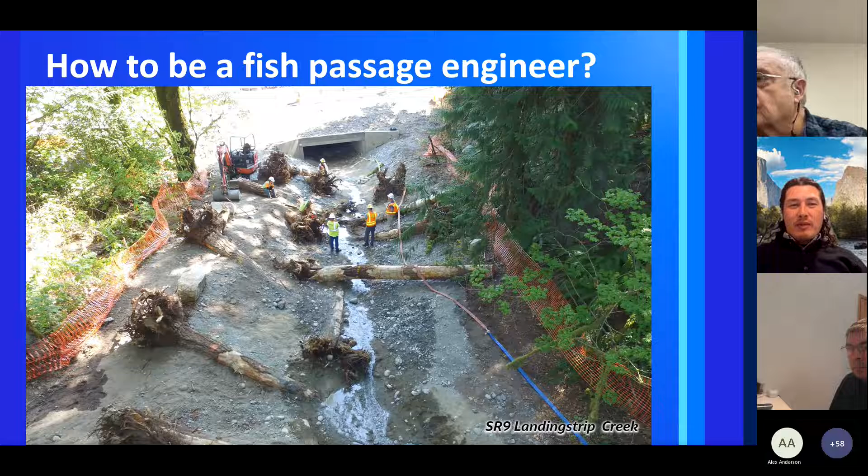Anyways, I'll share my experience in this presentation, highlight a project that Jacobs worked on, share some basic design approaches, share a little bit of how it's implemented into construction, and hopefully convince you guys by the end of this to join this fish passage movement if you haven't already.

I'll start by telling you that fish passage engineering has great stability, meaning there is a ton of funding out there to support it. I'll also share with you why I think it's really the best bang for your buck.

If you're thinking restoration, it really has a high cost benefit ratio if you're focused on habitat for fish. One reason I'm a fish passage engineer is I like to see immediate results. Once the project is complete, you can go out and see the fish literally swimming upstream of your project, and you've essentially opened that door that was otherwise shut for fish to pass and utilize that existing stream habitat.

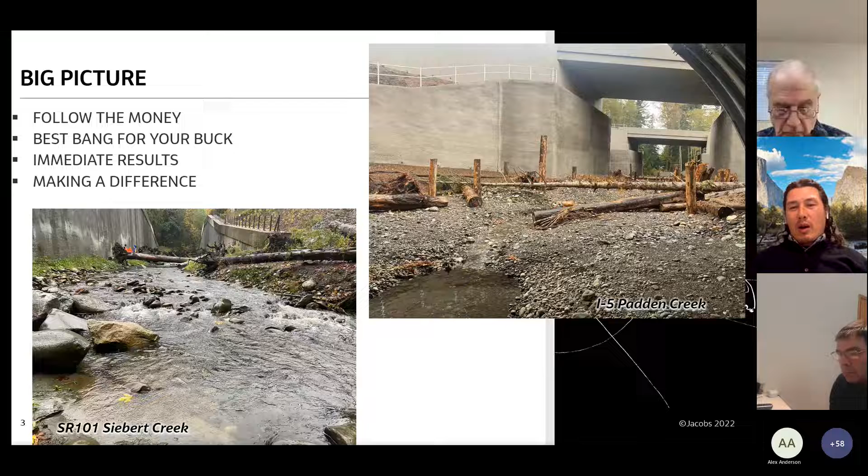The other part is just really that feel-good of making a difference. Again, a reason why I connect with fish passage is I like to work in that fringe where the natural world and the developed world literally intersect, and as an engineer, trying to find that balance between both the human living environment and the aquatic environment, and trying to get that to thrive together.

Fish passage really requires a multidisciplinary approach where the primary disciplines, in my experience, are not actually engineering. After putting together this presentation, I joked with some colleagues about how much engineering is actually in fish passage, which is kind of funny because it's really starting to get removed from it. But the engineering is still important, and it provides those checks and balances. But if you're really doing it right, the leading disciplines are really your science-based geomorphology and biology.

The engineering is there for that human piece of it, understanding how the designs really interact with the infrastructure, and to make sure we balance and see what kind of risk to life, property, or structures would be.

The reason fish passage is also exciting to me is there's no two fish passage projects alike. You have to start each project by really understanding what the existing conditions are, and you really focus and study that. You need to read the land - I'm going to hit this one really hard later in the presentation. This is that geomorphology piece.

So what's the purpose of all this? The fish, right? Too often I get in deep conversations with engineers or resource managers, and we actually lose sight of why we are here. We often have to remind myself or ask people in the room, hey, what would be best for the fish? Where's the fish biologist? We're stuck between these two concepts: what type of habitat do we need to create in this location? That'll start to go into some of the restoration pieces that I'll also talk about in this presentation.

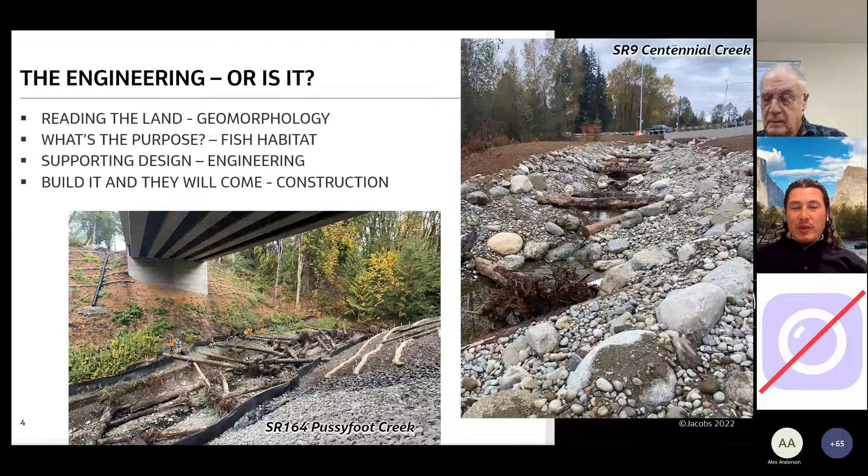So what are we spending on fish passage? This blows my mind in some regards. WashDOT had a federal court order in 2013 that found WashDOT and Washington State culverts violate the 1855 Treaty of Point Elliott and the Boldt decision of 1974. That guaranteed the tribes permanent access to their usual and customary fishing grounds.

Under the court order, the state had to accelerate its pace of culvert work specific to threatened and endangered species and salmon. So you can see WashDOT has set aside $2.4 billion for fish passage, and that's just what they've allocated - the actual cost is closer to $4 billion. That's a ton of money just in Washington State, and it's mostly dumped in the Puget Sound area. Any water bodies in the injunction area that flow into the Puget Sound is where a lot of that money is going.

This other funding package that just rolled out last month, if you're not aware of it, came from FHWA - part of their National Culvert Removal, Replacement, and Aquatic Organism Passage program. This is a $1 billion grant over about 8 to 10 years, but for the next biennium there's $200 million. So this is a big package that just rolled out. For those local agencies, tribes, and folks we're working with who say we don't have any money - well, there's a ton of money that just rolled out. So I'm pointing folks to that.

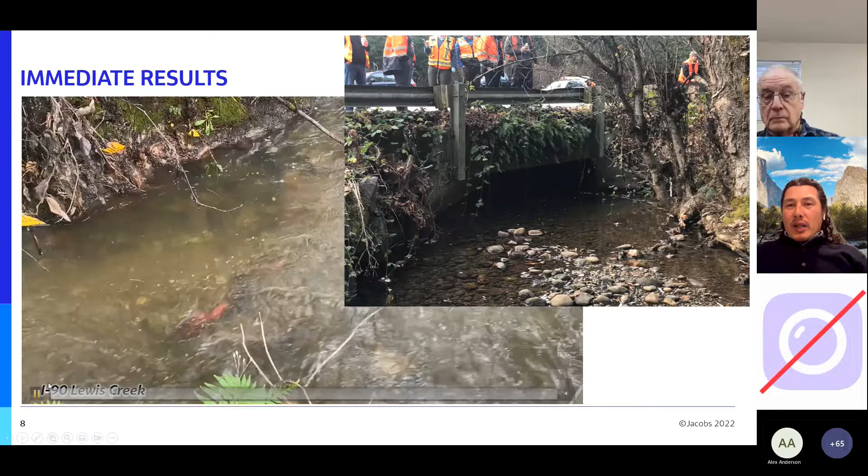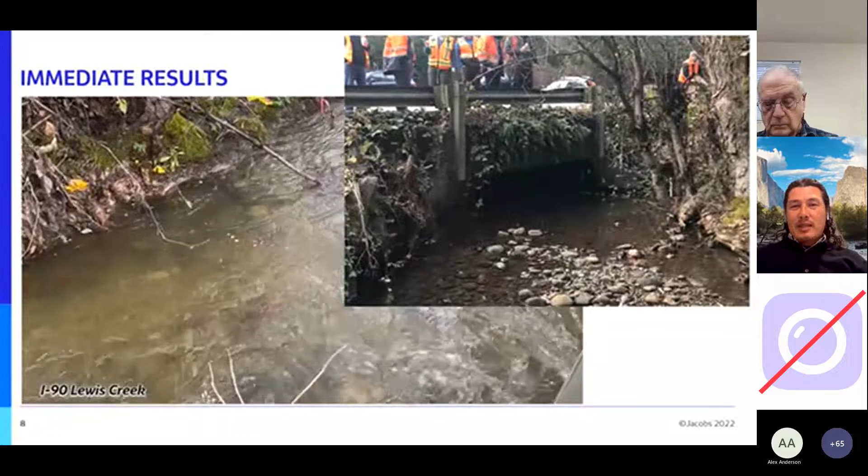Fish passage projects provide immediate results. This is a video I took of sockeye salmon returning to spawn in Lewis Creek, just up from Lake Sammamish, but they've reached the end of the road. This culvert's inlet, on the right, is 1,000-foot long, 4.5% slope. This limits their access to those spawning grounds.

This is a photo of the upstream. This is untouched natural habitat that we don't need to work on restoring, it already exists. We just need to get them to where they need to go.

There's a quote from a local representative last month that talked about the salmon. It said, salmon travel hundreds of miles to spawn only to be blocked by barriers within a few miles of pristine habitat. Simply put, culverts are wiping out salmon on the 1 yard line.

This is the Marshawn Lynch Super Bowl, where there's a touchdown on the right, or the end zone on the right, and they just can't get there. So, sorry, bad joke.

All right, well, making a difference. Most of the stream engineers I work with have the same inherent desire in common. We all want to be better engineers than our forefathers and better balance that built environment with the natural environment. We get to do that through our work in fish passage and stream restoration.

I remember saying to myself, I can't wait to show my kids the fish barriers that I've helped correct in my career, and then take them to the streams to see the salmon run. Well, I'm old enough to say that I'm there, and these are photos of my kids, some of them, and we're out there looking at the streams, finding fish.

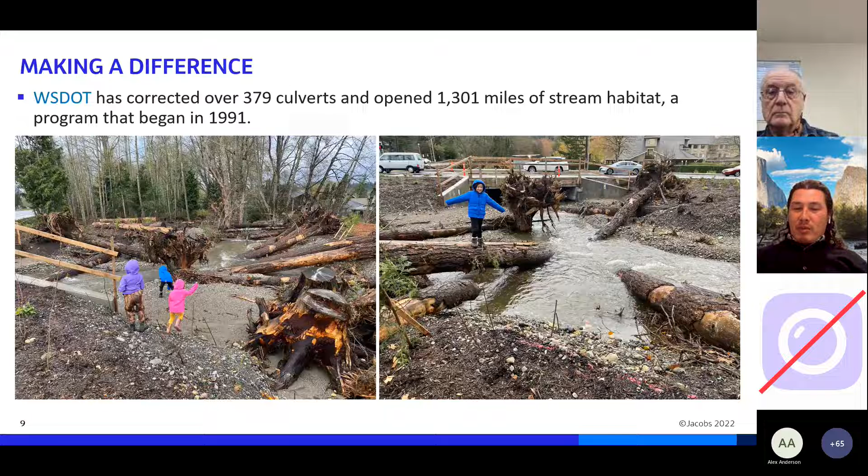So whether you have kids or not, this is actually a great time to start getting out in the streams. It's been dry for a while, so probably not much moving right now, but after we get a few more rains coming up, we'll start to see fish running up these streams and tributaries. Take the time, take out friends, family, significant others, and get out and see these fish in the streams, and maybe you can pick out a few barriers while you're out there. So this is the making a difference part.

All right, so here's where I step into the process of designing a fish passage project. There's the desktop analysis. Before you go out to the site, you're pulling out maps, looking at the geology, looking at LiDAR maps, land use. You might do some coarse hydrology to get a sense of what's coming down the pipe. You're looking upstream, downstream, other barriers that may be on site that may impact the crossing you're working on. The DFW has a great website with all these barriers listed, where you can switch over to different maps to get that 30,000-foot view.

I tend to actually use the hillshade map just to kind of read the land, and then turn on the hydrography and the topography and fish distribution. So this is a good first cut to see what's going on out there.

In this example, you can see that the stream is really confined in that upper reach. And then as it reaches the highway, which is the red line down at the bottom, there's kind of a blow up there, you can see this historical alluvial fan that's been depositing sediment over the years, where the stream's really mobilized out of all that sediment from the earth.

This is Log Boom Park in Kenmore, for those who may know the area. The sad reality is that alluvial fan is completely developed and has $1 million condos sitting on top of it, with people who usually complain about sediment and flooding.

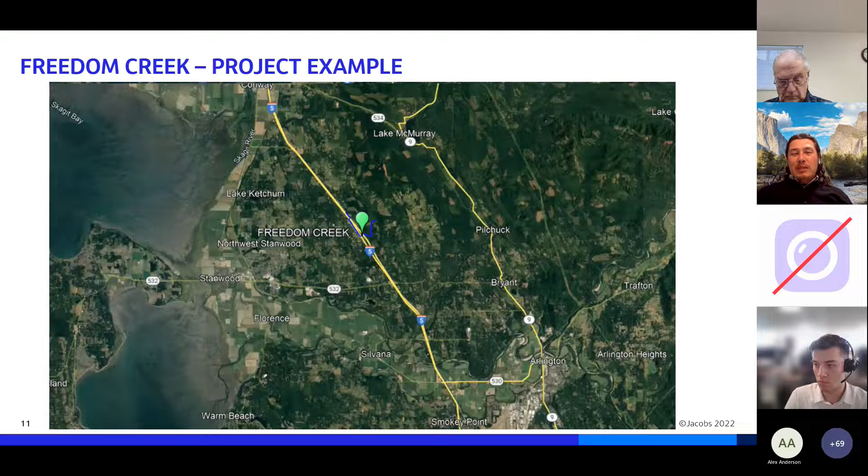That's a sidebar. Anyways, let's jump into another project example. This is one that Jacobs has done. This is a design that's been complete. It hasn't been constructed yet, but this is a project north of Stanwood on I-5.

This is just north of the scales. There's some scales on northbound. So you got flow coming in from right to left. It crosses the frontage road, Hall Road, that's the county road, crosses I-5 northbound, goes into a median that's vegetated, and then crosses southbound I-5 before it goes into kind of a wetland reed canary grass section.

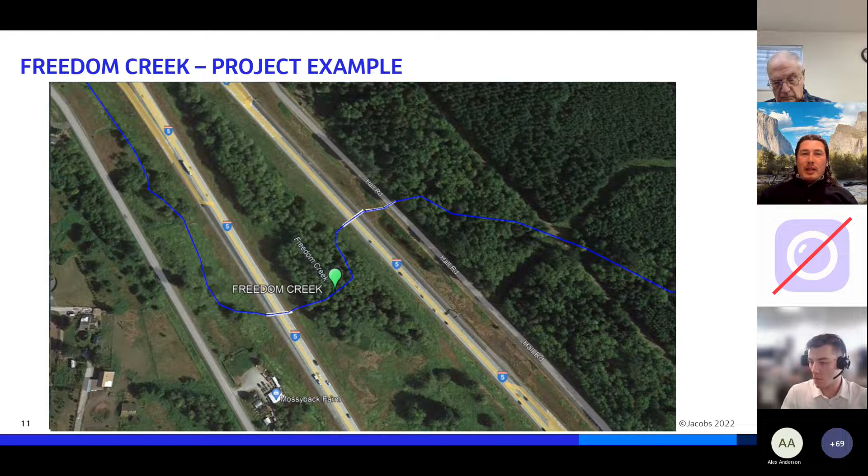As I mentioned, the first step of any fish passage project is to read the land, which is really the part I enjoy the most in the design phase. So we're really assessing the site.

This is usually led by a fluvial geomorphologist. And for those who don't know, that is a licensed geologist who has a focus in fluvial processes, which is specific to that interaction of water and sediment over the land.

So in addition to that geomorphologist, you need a solid stream team. And so it's geomorph, you have a biologist, hydrologist, and a hydraulic engineer. So these disciplines are really critical in covering all those areas necessary in a fish passage project.

In this map, you can see the stream team with these people there identify those different types of reaches in the system, including reference reaches, pebble counts, bankful widths.

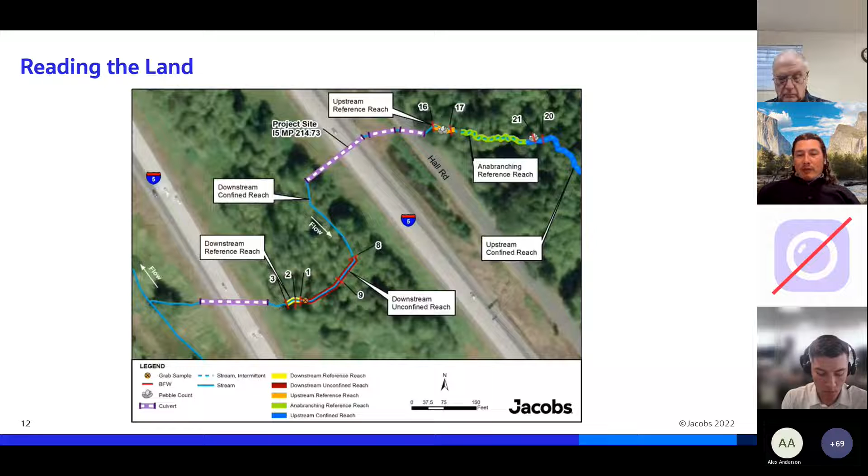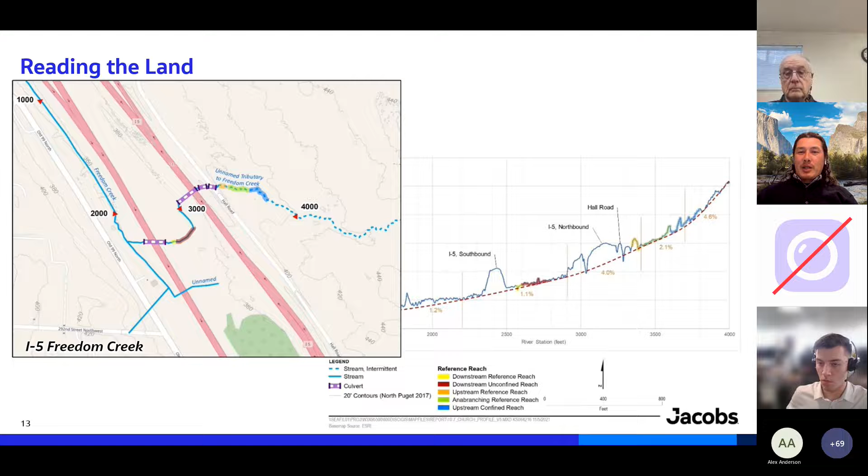Now, it doesn't seem like much transitioning from that 4% to 1%, but as I'll show you, water moves very differently down slope with even a 1% change in slope, and I'll share that later on the last slide for this section. But the point of this is to really make sure you take in all the story being told by the land before you start into your design, because there's a lot of answers that are just right in front of you, but you just have to make sure you're paying attention and leaning into it.

On the right side, you have an unconfined reach. You have a braided reach. This may represent a kind of pre-disturbance. It's kind of an anabranching network, as we call it. And then it transitions into a single thread channel, but it currently exhibits multiple threads and extensive sediment deposition. This will come back around here in another slide.

This is what they're looking for: stream morphology, channel geometry, and flow regimes—the different types of flow rates expected through the system. They're doing pebble counts to assess sediment mobility or lack thereof, maybe dealing with big boulders. Substrate or subsurface work involves taking grab samples to understand what's going on underneath that armor layer.

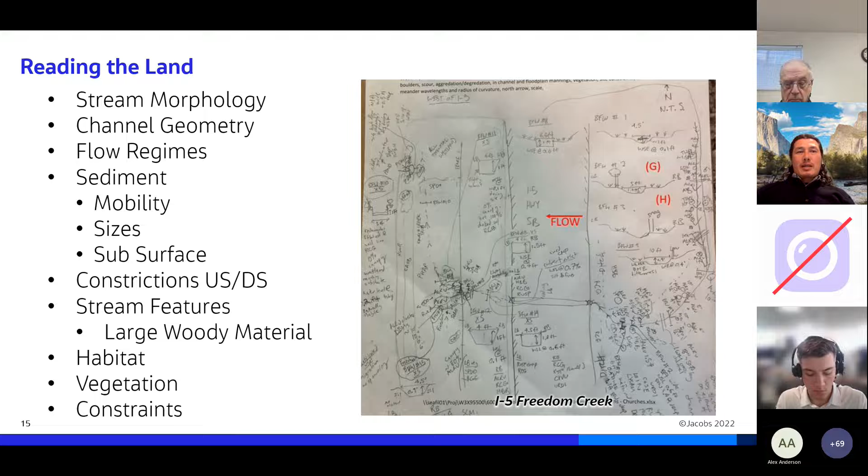They're looking at constrictions upstream and downstream that may occur, stream features like large woody material, trees, or jams, and that rolls into the habitat, which is also made up of vegetation and any other constraints you might see due to development.

So this is a big part of doing that field work—getting out in the field and measuring the bank full width. Bank full width has historically been the driver in how to size your structures. In this case, there were multiple measurements: 6 feet, 7 foot, 6 foot, and 7 foot, so averaging 6.5 feet of bank full width. That gives a general sense of what the channel wants to become in its natural environment.

One thing I tell teams, which is hard to do, is try to imagine as you see these in the field what that 2-year flow looks like. Where's the water going? What does the 50-year look like? What does the 100-year look like? As the engineer, those are the design flow rates you want to look for—pretty rare, but you still want to understand what's going on at that 100-year event. That goes into the engineering work I'll touch on in a second.

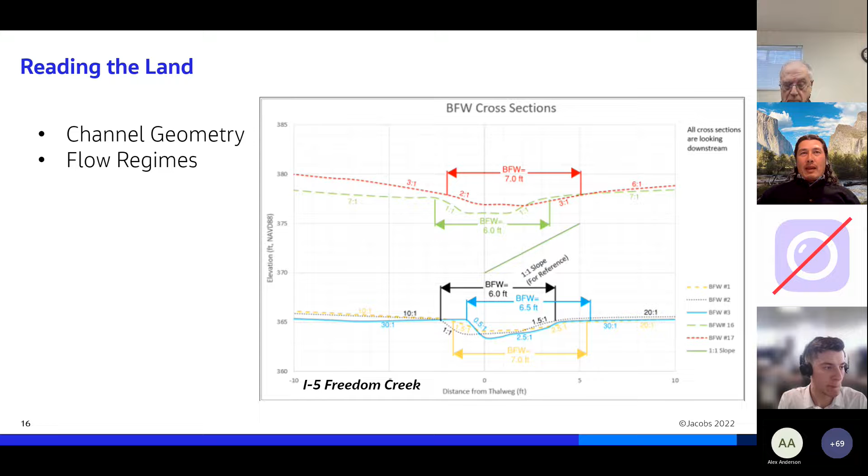The last slide I want to talk about is stream morphology, adapted from Montgomery and Buffington in 1997. These are typical stream morphologies in the lowlands of the Pacific Northwest. The steeper reaches up in the mountains are more of a cascade, greater than 7%. In the flatter areas we're talking wetlandy type streams, less than 0.5%, which is typical of Western Washington.

The difference between what you're seeing on the left and the right: the one on the left doesn't show wood presence. The example on the right is what we typically are seeing, and what we built in an example project is that wood-forced step-pool morphology. You can almost apply wood to any of those—step-pool, plane bed, and pool riffle—in any of those slope gradients, and you're going to get a more dynamic stream morphology.

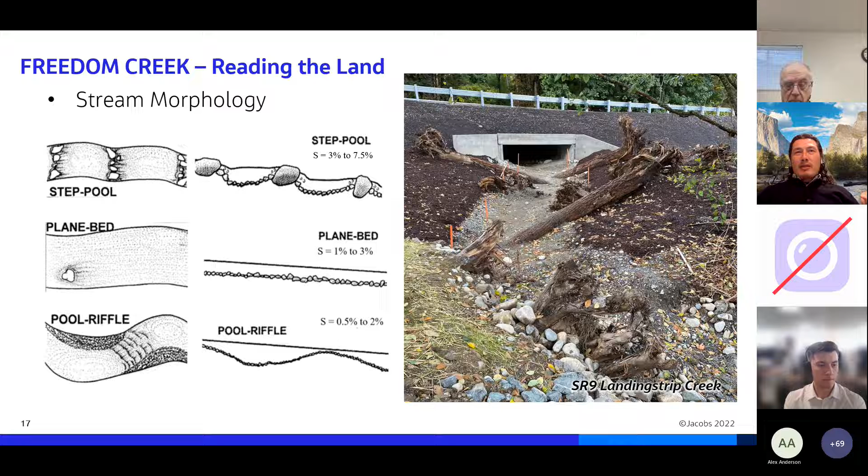That's the important piece for fish. I'm going to hit on that, but remember that diversity, complexity, and variability are the key to that.

I asked one of my fish friends how we design for fish habitat, and he told me plainly: just look around you. If you can match the natural conditions that Mother Nature has done, the habitat will take care of itself. This sounds like what we just did—matching the reference reach. It goes back to reading the land and seeing where the complexity is occurring.

Fish passage is not just fish passage anymore. We can't just be engineers looking at conveying from one side to the other of a crossing—we have to consider the restoration aspects of this. WSDOT has actually retitled their training; their fish passage training is now called fish passage and stream restoration. Some of you are signed up for that in December, but it's not just fish passage, it's fish passage and stream restoration.

Most often the work done in the fish passage world requires additional stream reconstruction up and downstream of a crossing. Since we're already there replacing and removing, providing some additional restoration is typically pretty simple and not a huge lift compared to the structure being replaced. We're just trying to create that enhancement of the crossing, so when the fish are able to move, they actually have something valuable.

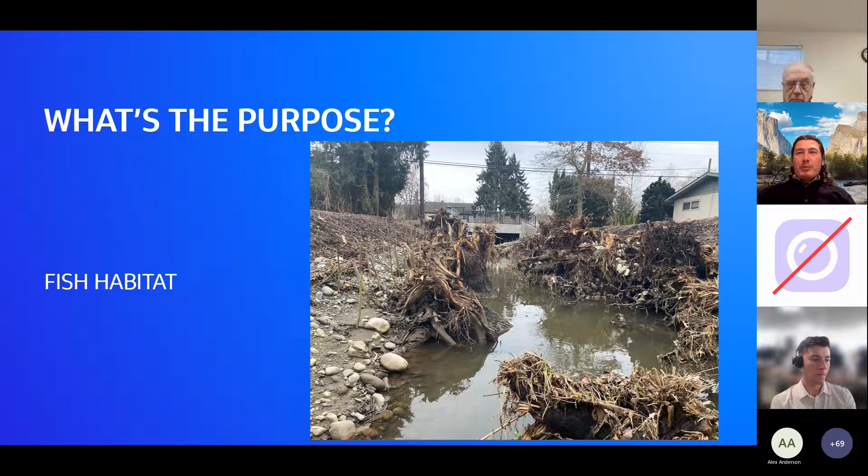Since the right-of-way is already owned by, most of my situations are WashDOT, it's like, well, we own the property, let's just do the right thing and be stewards and put some quality restoration up and downstream of our crossing.

So the other benefits of habitat is the sediments, the riparian vegetation, those stream features, in-stream complexity, which could be wood or plantings. This diversity is what fish habitat is - the variability of flow velocities, variability of pool depths, variability of sediment sizing.

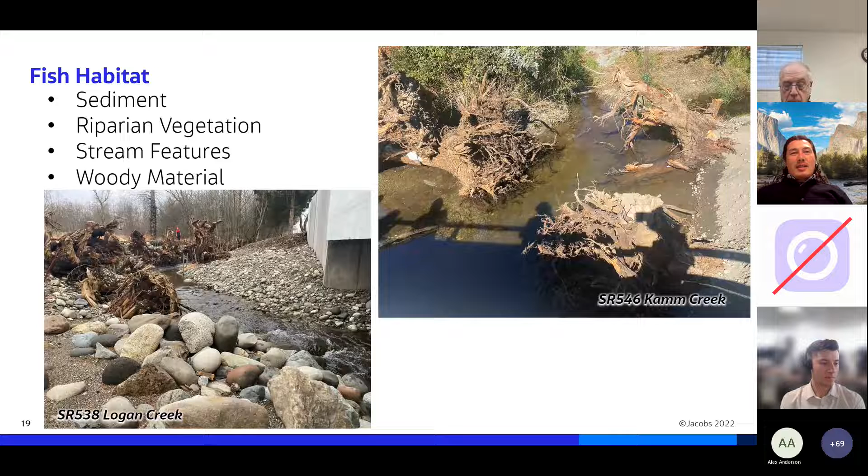I asked another fish friend of mine, how do I know where the fish are? What's the fish habitat? He said, well, if you were to go fishing, where would you throw your line? Of course I'd throw it underneath these pools or around the riffles. That's where the fish are. So it's not rocket science, it's just trying to create that variability is what we're focusing on.

Here's an example of kind of an intense restoration effort. This is done on SR20, tributary to Skagit River. The downstream of the arrow is the Skagit River. So we had opportunity to kind of go high risk here and just throw a bunch of wood at it.

When we add wood to these systems, we're creating that variability. We're creating some obstructions, which are going to create changes in velocity, create scour, which creates depths of pools, which helps to sort out sediment. So we're getting that variability through this type of concept design.

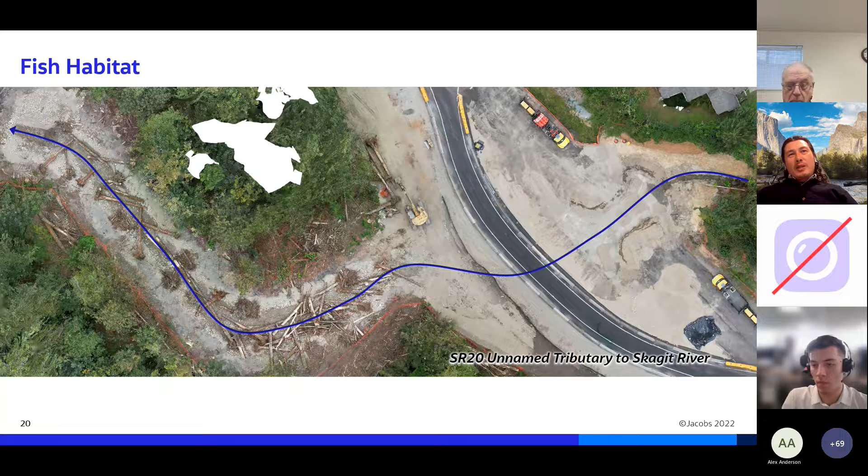So that's pretty cool when we can get outside of our crossing. This is actually flowing right now - this is an old photo, so I haven't been up there since that culvert's been installed and water is moving through it. It's a good time to go up there, maybe after a high flow event, as Skagit rises, and see if fish are up here in this tributary.

So that's great when we're outside of a crossing, but what about inside the crossing? How do we deal with that? So I got to give credit to Channing Sims - he's one of my co-leads on the design realm, design managers at WashDOT.

He put together this rendering and a lot of the design work on this. Also kudos out to Derek Marks - he was also a big part of putting together this design concept.

In this concept, these are meander bars. We're looking to mimic those natural conditions that we would see outside. This is that advancement of the biomimicry and the eco-hydraulics, as we're calling it. We're trying to create that inside an unnatural place. So the evolution of these designs has been challenging, but we're really trying to find the tools that help us to mimic those natural conditions.

This in itself is creating a hard bank. It's not part of the bed, but it's a hard bank feature that's dissipating energy and creating a scour hole. Again, we're creating some diversity in the stream hydraulics where we get increased velocities, increased shear stress, and then we get pool formation. And then you get tail outs on the backside, so you get some slow moving water for fish to also hang out in at higher flows.

So this is a great example that we're using more and more often. We just don't have the opportunity to put in - trees can't grow inside culverts, and we don't always have the room to put in large pieces of wood. So that's what these are really emulating, is these large bank features.

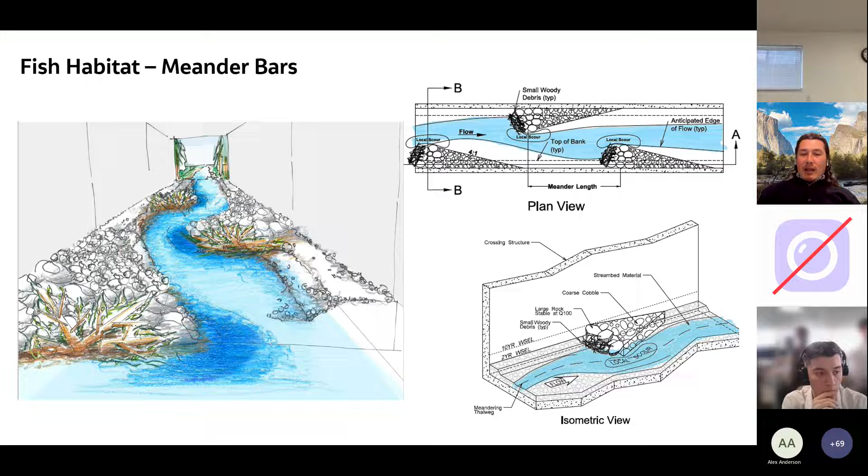All right, so this is jumping in a little bit to the design side of things, the engineering as I call it, but we'll see if we actually touch the engineering. I did learn early on from one of my mentors in the fish passage world that in designing a fish passage, there are many different ways to design a successful fish passage project.

You just want to make sure you don't choose the wrong one. What this means is, it goes back to my duties as the design manager who reviews many of these fish passage designs - I don't always dive into the details and tell people how to do it right or how to design it. I just make sure I'm asking the right questions to make sure they're not going in wrong directions, or if I see a risk to a project, I say, how are you going to address this, or how are you going to mitigate that?

So there's many ways to get a successful project, but there are some known pitfalls that we try to avoid. And so that becomes my job, trying to identify those higher risk elements, particularly to life, property, or infrastructure.

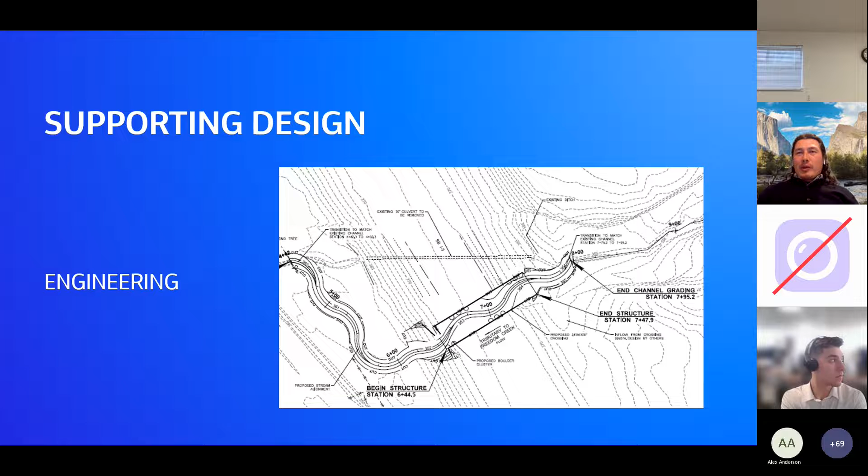So the engineering, as we're going to call it, begins with how much water are we dealing with. What's the estimated hydrology? I don't know if anyone calculates hydrology, I think we really estimate it, so I'm not sure if we can call that engineering quite yet. In this example, there were two different methods looked at, and ideally the design team will justify which method they chose over the other. In this example, they were pretty close, so if anything, this just assures you that the hydrology we're starting off with is probably pretty accurate.

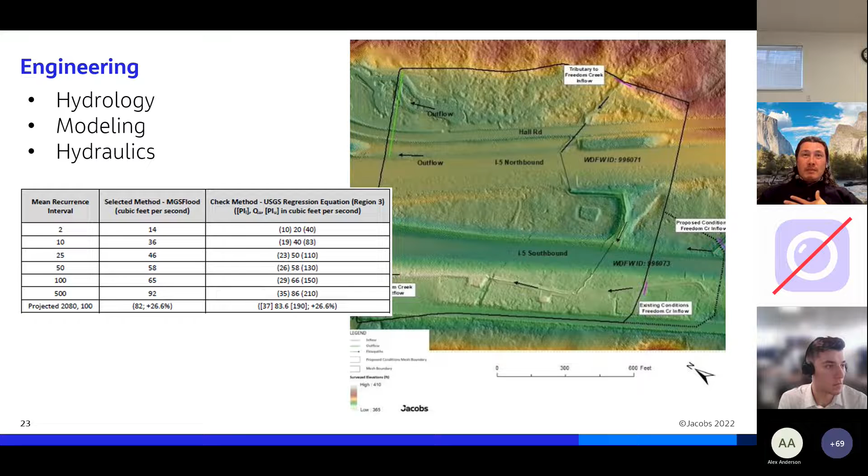All right, so next steps in the engineering world is to run these existing conditions. So many designers I see actually rush through this existing conditions model so they can move into their proposed design. And I say, sit in that existing conditions and really understand what's going on in that model, in those reference reaches you were hopefully able to model. You're not always able to model a reference reach, but if you do, what's going on? Remember, that reach is what we want to match or mimic. So if we can use that to see what's going on, that's going to help us understand the stream bed material sizing, the bank composition, how different flow regimes will move through that reach.

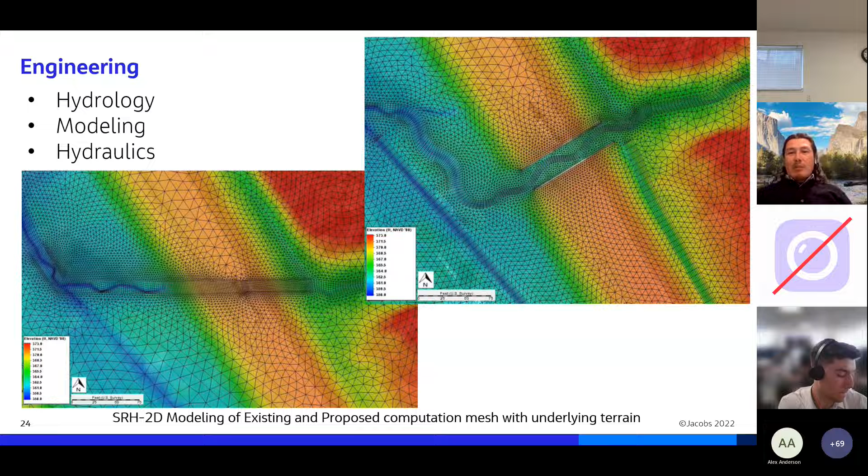And essentially, it'll help us identify what type of fish habitat is present. So after that was the mesh photos I showed you, but next, you turn your hose on, you turn the hydrology on through your system to see what flows are looking like, what depths are looking like.

This is the SMS SRH 2D developed by Aquaveo for those who aren't familiar with it, but flow is coming from right to left, by the way. So you can see on the left in the existing conditions, there's a backwater at the roadway condition. This is on the southbound. This Freedom Creek crossing has two crossings - this is the southbound crossing, and you get a backwater condition occurring on the upstream in the existing conditions. In the proposed conditions that's allowed to flow, you get more diversity in stream velocities and depths, as well as sediment diversity. So this again goes back to enhancing or increasing some of that fish habitat.

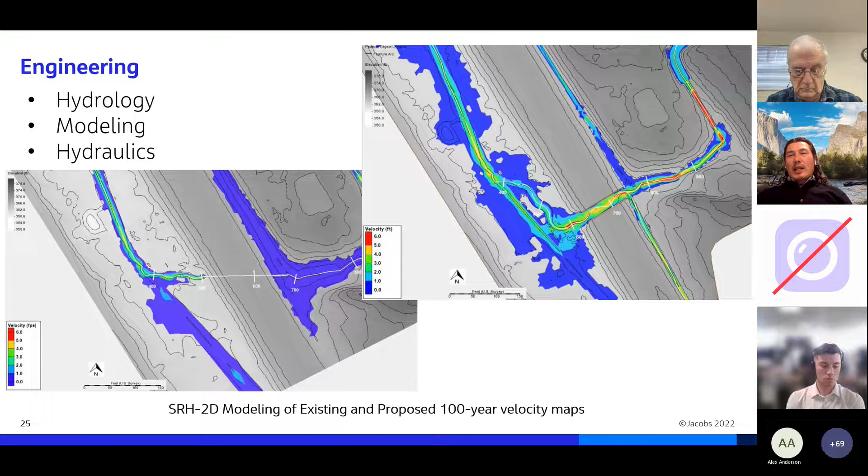So now I'm jumping back up to the upstream crossing - maybe people aren't even following that, but that's fine. This is just an example showing the comparison between existing and proposed. You can see, again, the backwatering in this case is set up behind Hall Road in the existing condition, causing sediment deposition. That's that braided, interbranching, unconfined reach I showed you a picture of. So that's occurring upstream of Hall Road.

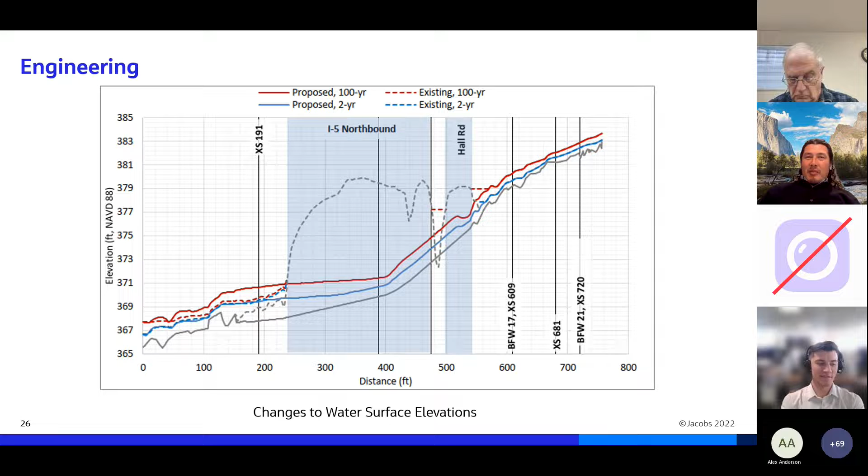Downstream, the condition is showing a localized rise, but it eventually returns to its equilibrium water surface elevation a few hundred feet downstream because of continuity of fluids. You'd be surprised how many people I had to explain this to. We tell them, hey, we're replacing this crossing, and they live downstream, and they're concerned. They say, well, once you remove that, you're going to be adding more water through the crossing. We're not adding more water - it's the same water, we're just removing the impediment or the constriction. So it's just basic continuity of fluids.

So okay, here we are. This is where the engineering actually comes in - or well, not really, or not anymore. Maybe it used to.

Well, let me explain this. Engineering is actually starting to be phased out, because a stream really shouldn't have anything to do with engineering, except maybe the scour calculations, or something else that's engineering.

But anyways, the stream simulation equation that some of you may be aware of calculated the width of a crossing that was to simulate a stream. So that equation was bank full width, measured in the field, times 1.2, which is essentially 20% more than the bank full width, plus a fluff factor of 2 feet. So that was the engineering, if you want to call it that.

But nowadays, that's truly just the absolute minimum that we're starting with. That's kind of the starting point, because in today's fish passage world, we're really looking at that continuity of channel processes.

So for those familiar with the hydraulics manual, it's good to read that every 6 months. I tend to read it every 6 months because I need to remind myself, what are we looking for?

That continuity of channel processes is kind of a reach-based approach to allow that continuity of processes, such as the natural movement of water, sediment, wood, and aquatic organisms, to occur. This requires investigating the system as a whole, rather than only focusing on the channel corridor near the roadway. So as part of the system evaluation, defining an appropriately sized channel corridor within a water crossing is essential for sustaining that natural stream function.

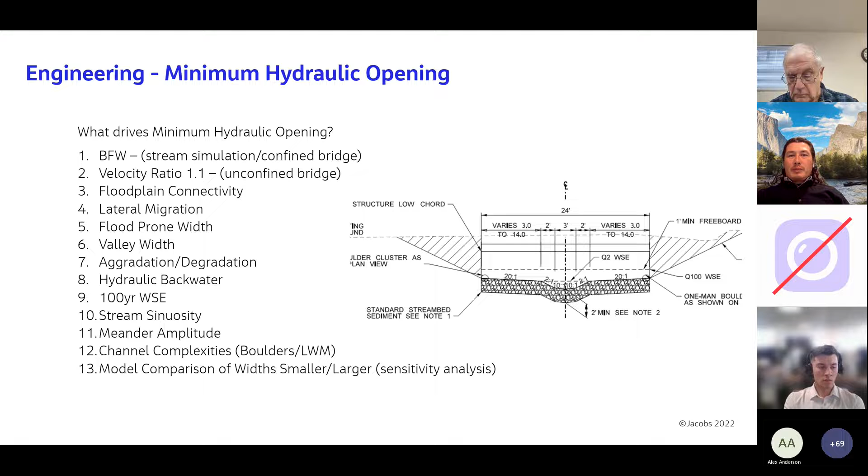All right, so you have your stream morphology that you're mimicking, your stream material you're mimicking, your stream geometry you're mimicking, stream features you're mimicking, and you get this final stream plan.

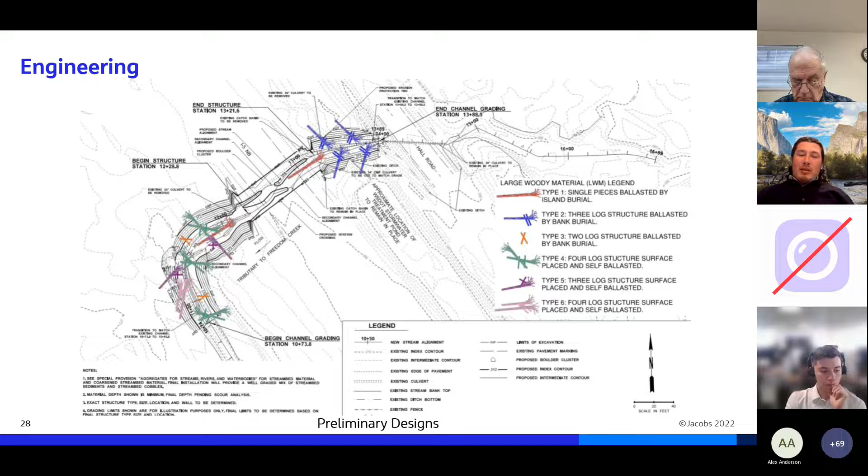So the next phase after this is really just to package this all up using other civil elements to help support a bid package, and then put this out in the streets for bid and into construction.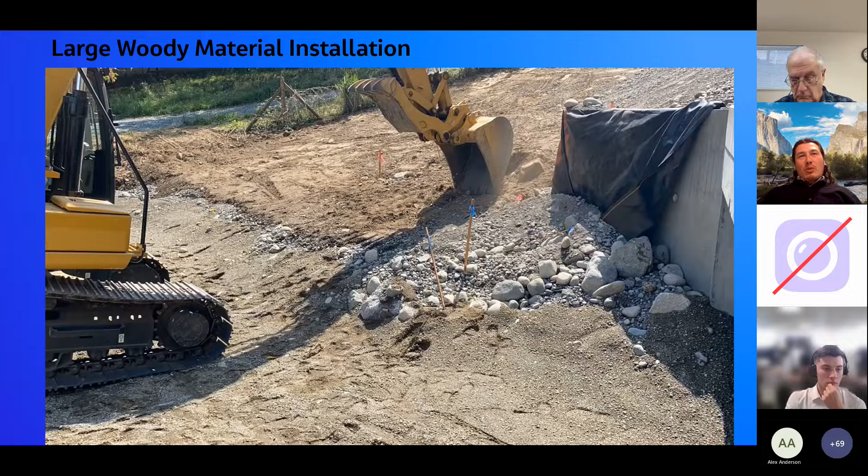So this is the fun part. There's not a whole lot here, and I'd be happy to go into construction conversation and questions if people have them, but this is the work part. This is getting to see things finally get built.

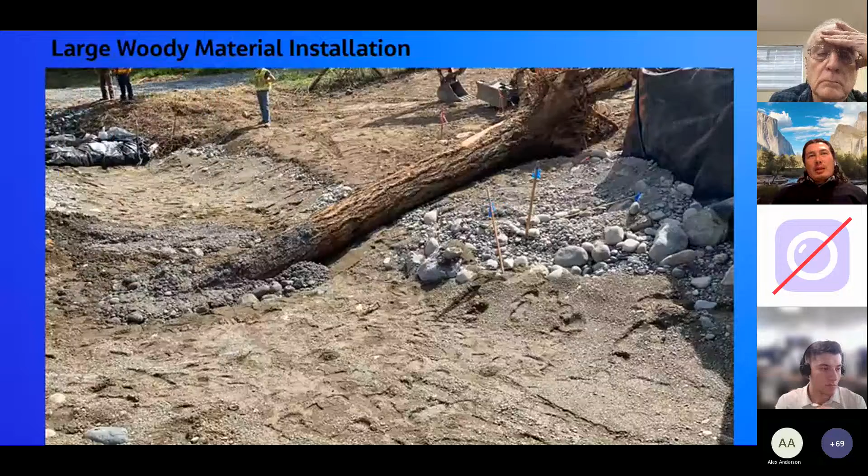So this is a time-lapse installation of wood downstream of landing strip. I shared a couple photos of this one already. One takeaway, if I were to do it again, is something I learned this past year about the incorporation of slash, small woody debris, into the backfill. I would incorporate slash back into it all the way up to the high water mark. That helps with stability in the log, and prevents some of that incising that actually occurred on the site. So that's a huge takeaway.

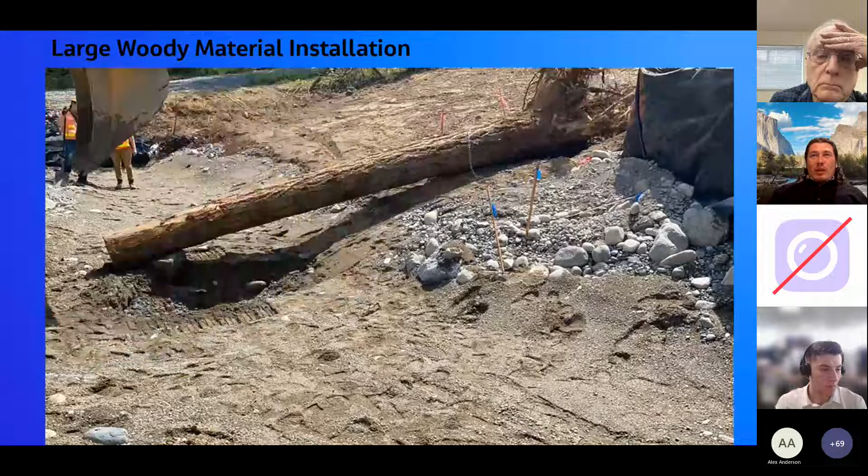And actually the wood and the logs helped maintain the stream bed, which could have been otherwise worse off if we hadn't put it in there.

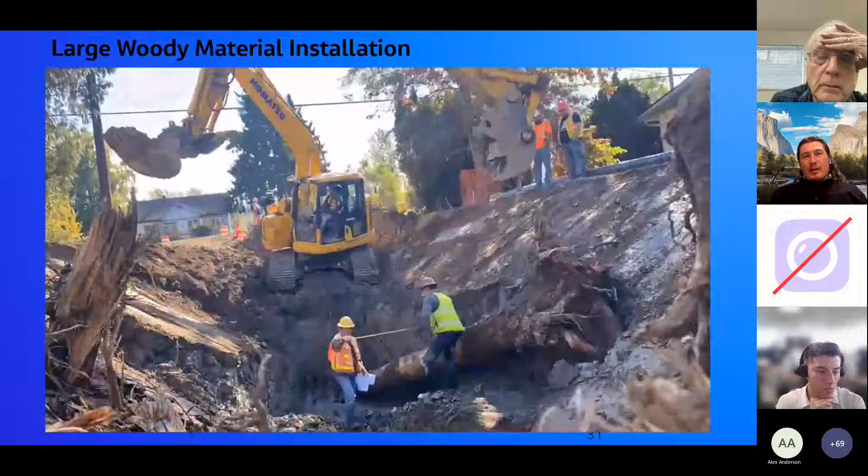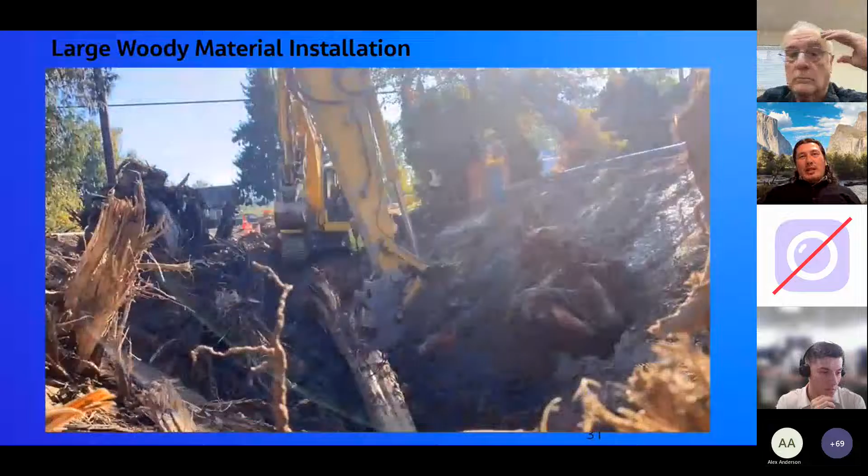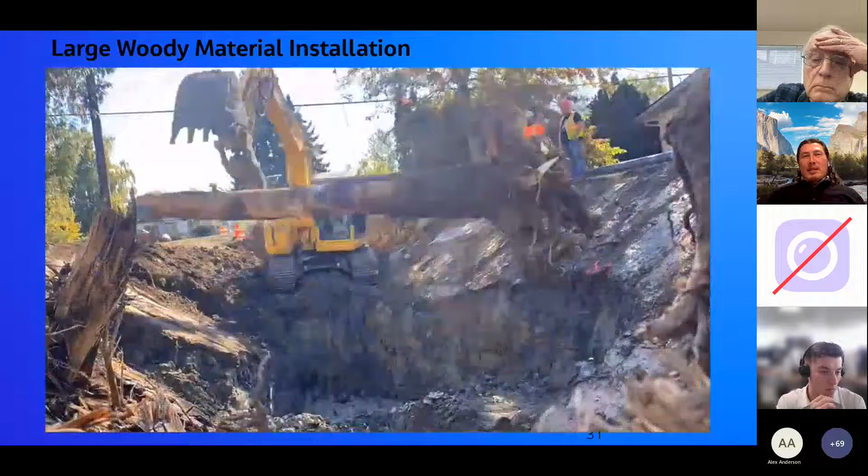Here's another time lapse, this is Logan Creek in Mount Vernon. This is actually inside the channel, this view is looking upstream, literally in the stream channel. You can see the amount of wood being incorporated into the channel to support the habitat piece of it. This was probably by far the most intense wood layout I've been a part of. It was the density, the density that was intense.

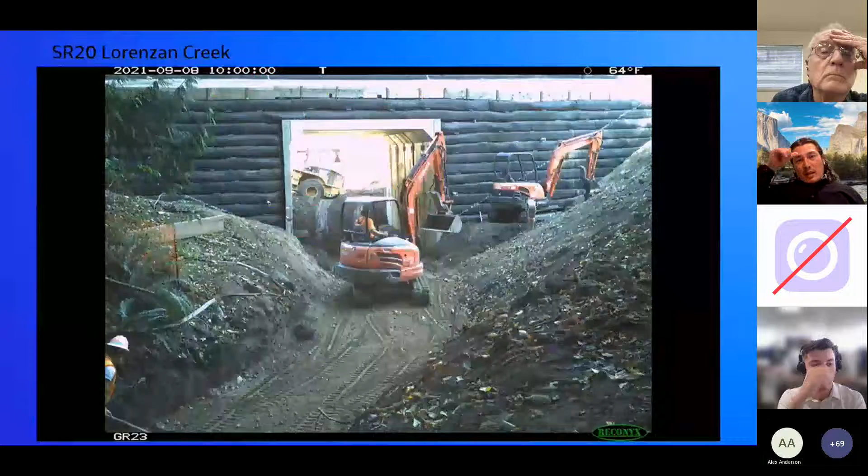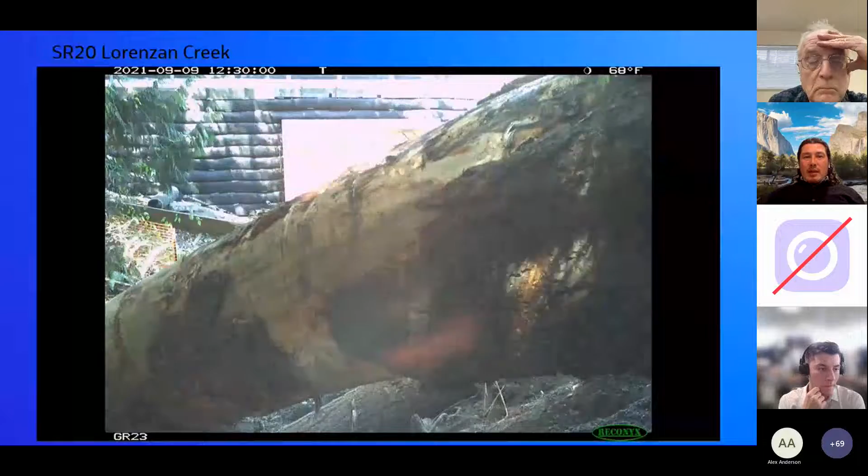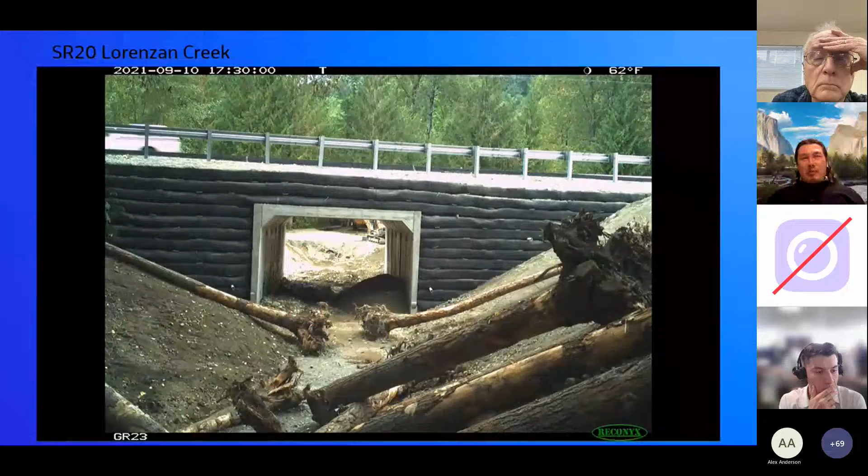Here's another solid project, this is in Concrete, Washington. That's SR20 Lorenzan Creek. This one, you'll start to see once the camera moves, is the meander bars installed in the structure. We actually added a meander bar, so if you watch closely you'll see a meander bar gets added later on upstream. But this is a good example. It shows that sinuosity, shows how the meander bars are functioning, and the wood also is supporting that habitat function.

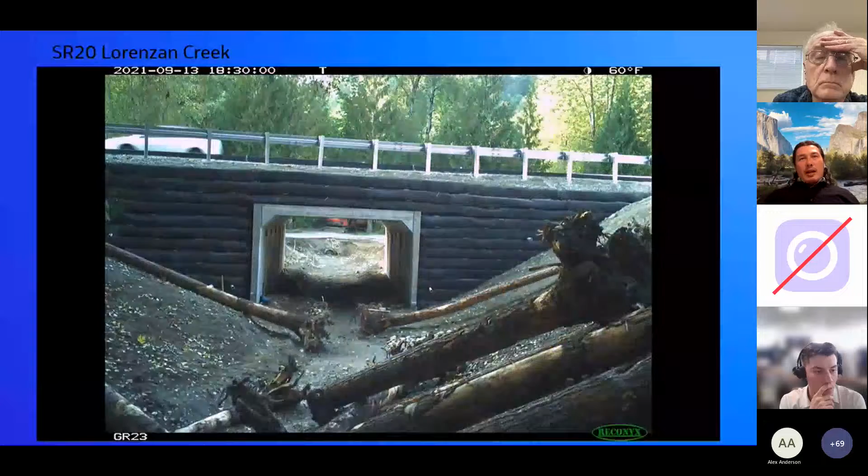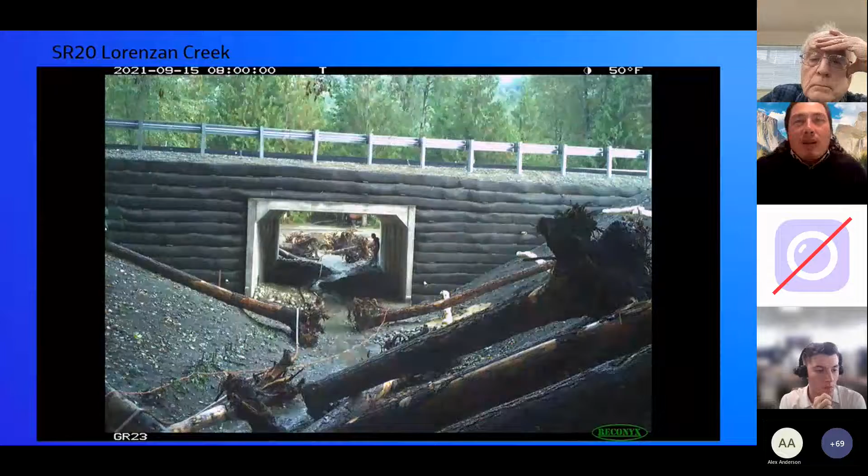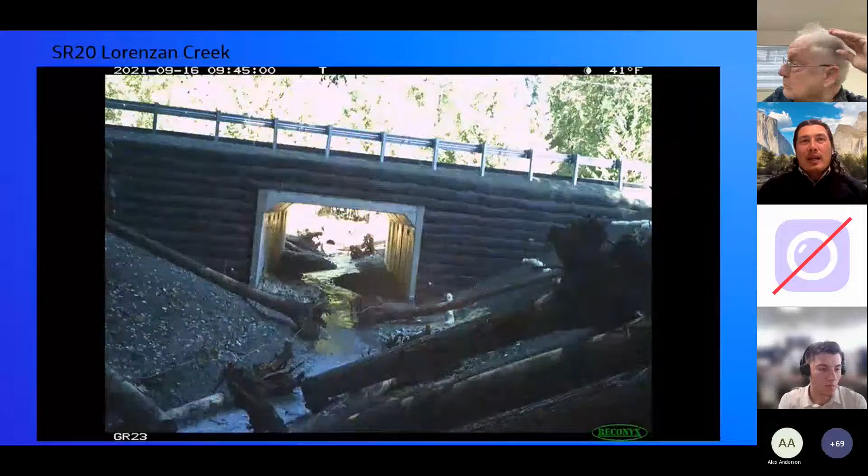Sad piece of this, and the idea is, there's an upstream culvert. You can see it through the new culvert, that's a barrier to fish. So that's the piece that hopefully with this project, it gets that project funding and gives them a reason to replace that and then restore future habitat upstream.

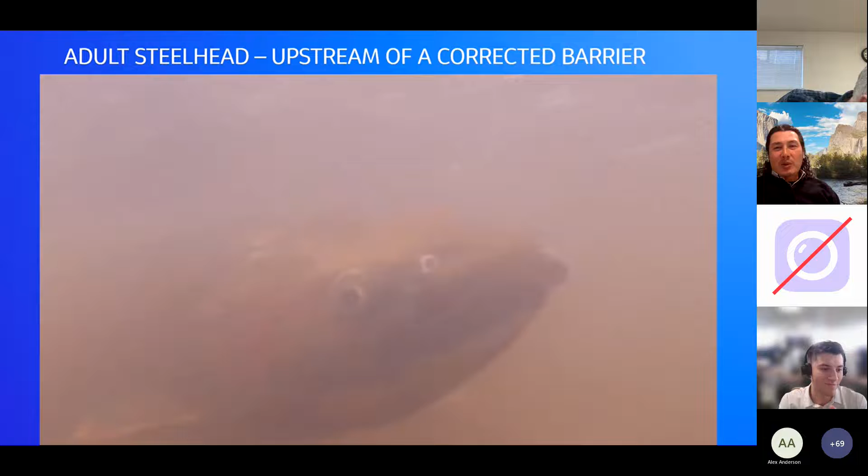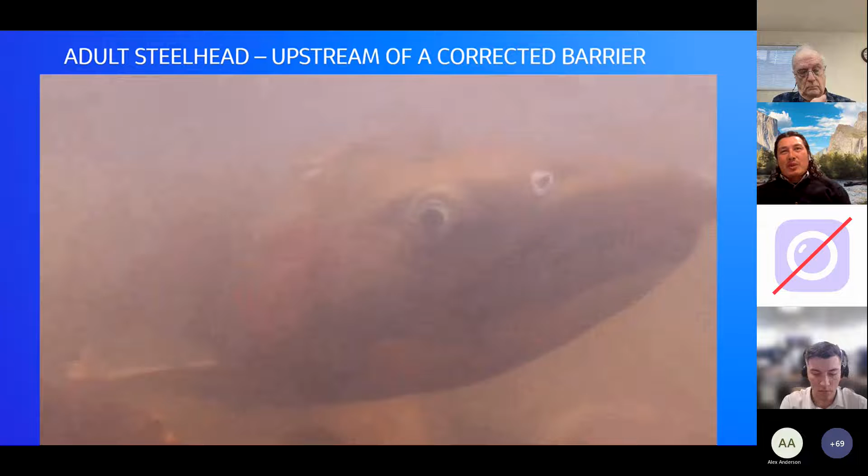All right, so this imagery, this video goes back to showcasing those immediate results and making an impact. So this is a steelhead. This is a video I was able to take upstream of a crossing that was repaired or corrected last year. This is up in Padden Creek, up in Bellingham. And there was a mate that this one was with, and it was just cool to see a steelhead that close, just hanging out there.

This is the reason I really got into fish passage engineering, and a good reason why many of us should give it a try. I think salmon are known as that keystone species, as they are a sign of a healthy ecosystem. They contribute as a food source to humans, are particularly more valuable to indigenous cultures because of their spiritual and cultural values. Food source for larger mammals and species, and they're also a benefit when they decay - the nitrogen and phosphorus that they contribute to the systems is invaluable to the plants around them.